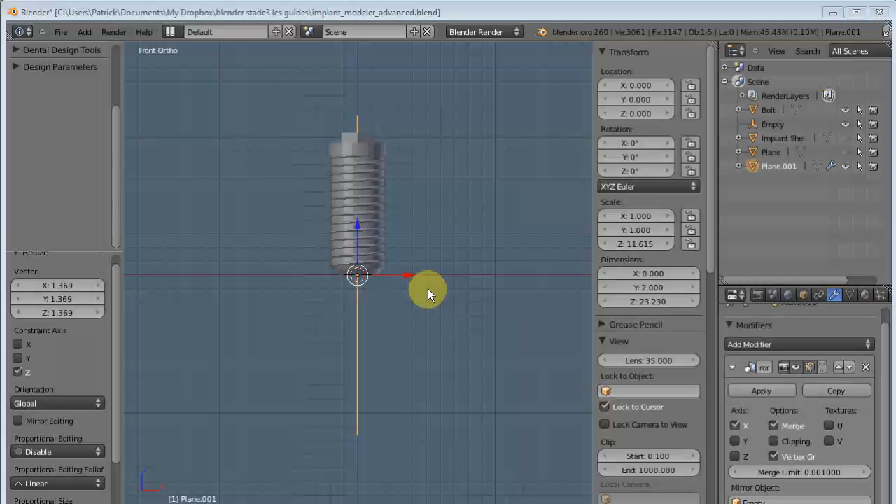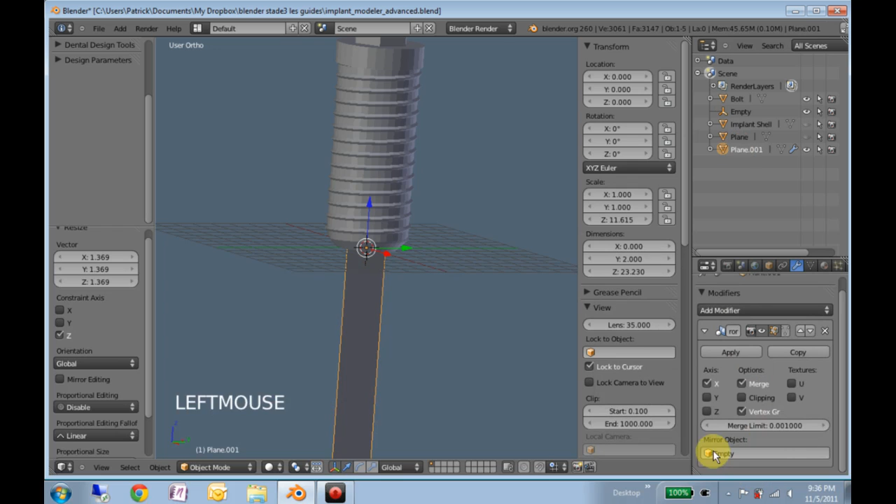Wanted to demonstrate quickly how to make a tapered implant. What I have here is a plane which I've just scaled to be long enough so that it covers the whole implant. I've added an empty at the origin, and then to the plane I've added a mirror modifier.

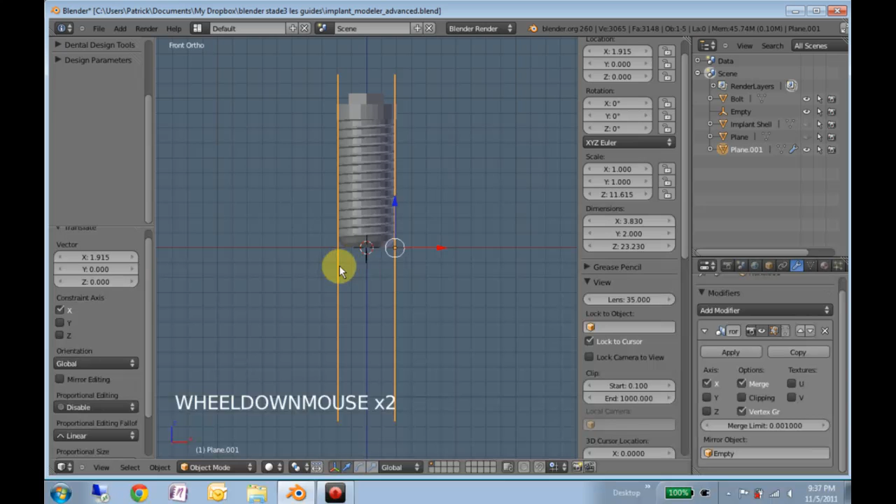So this one, and then made the mirror object the empty. So that allows whenever I move this, I get a corresponding mirrored plane on the other side of the origin. So if we know what we want the apical diameter of our implant to be, we can move this plane. If the apical diameter is, let's say, 2 millimeters, we can move the plane 1 unit to the right.

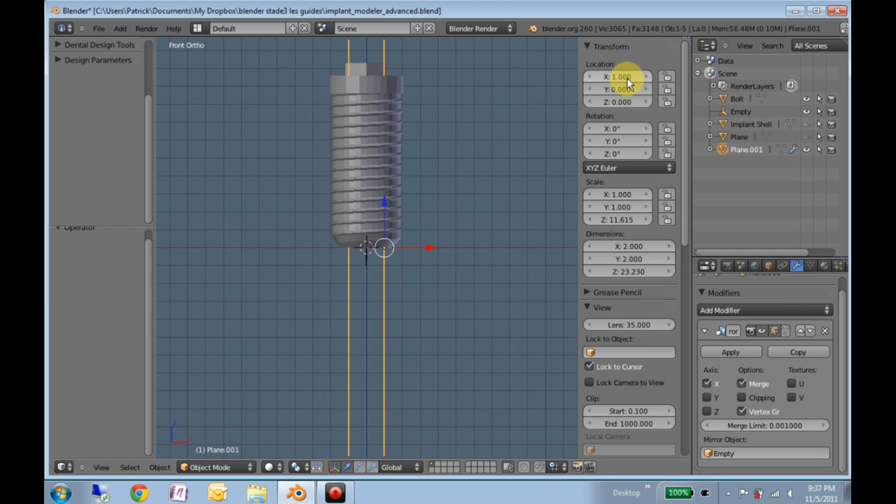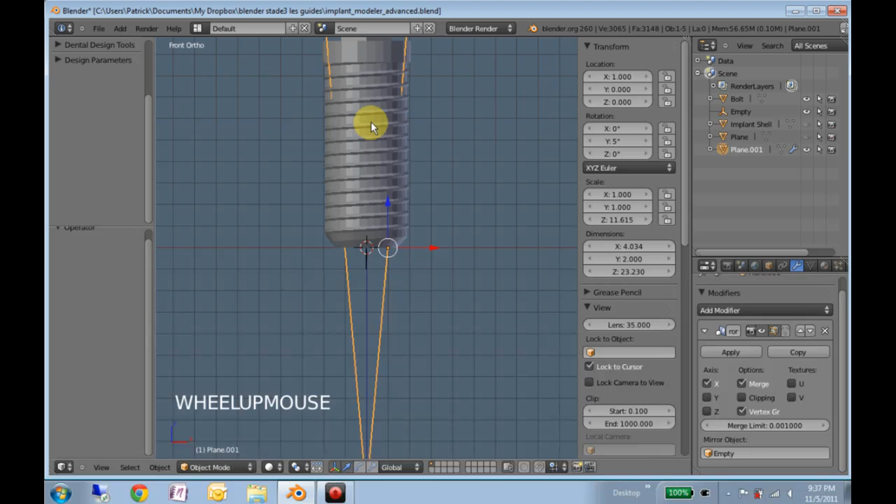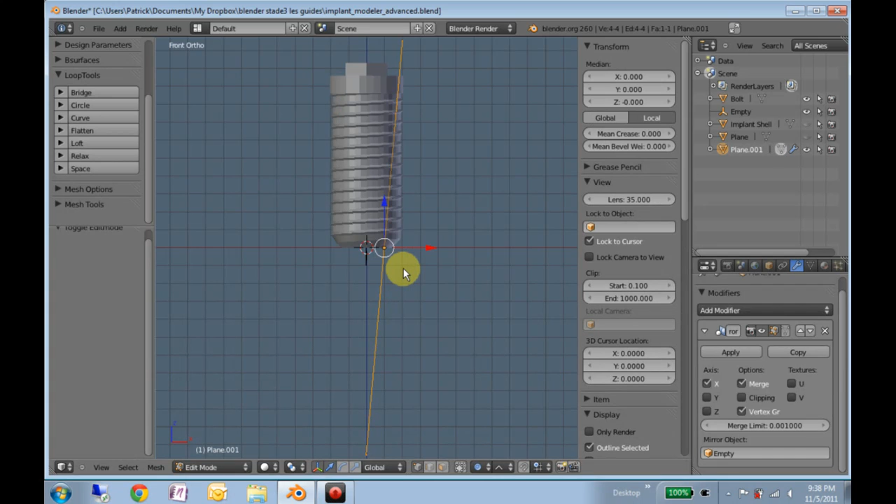And if we know the taper is 15 degrees, rotate it like that. That's probably a bit much, but 5 degree. Okay, so then we'll use that as our guide. Here, tab into edit mode. I can't see the planes. Let me do one quick thing. Okay.

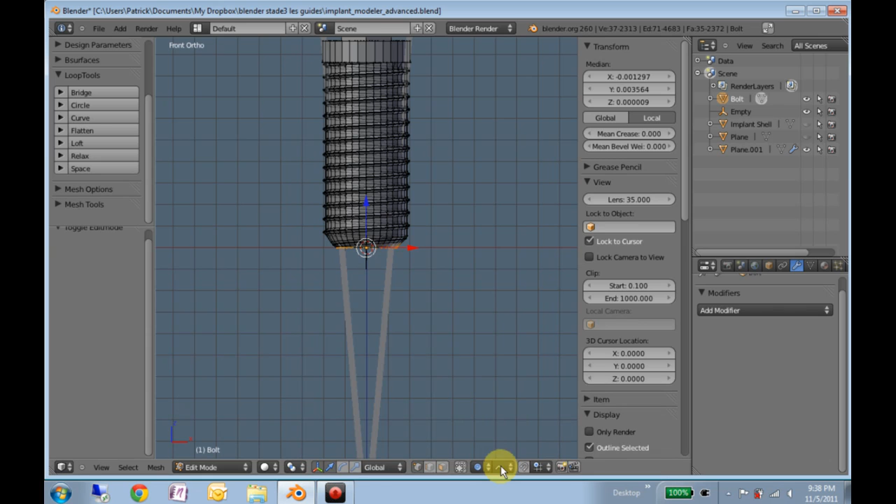So once we're in edit mode, we'll enable proportional editing, make it linear, which it is, and then select just the bottom set of vertices. That will allow us to scale, and we'll limit it to the X direction.

So we don't want to include the collar. Well, I guess you can, but then you can use your guide geometry to fit yourself within your guide geometry.

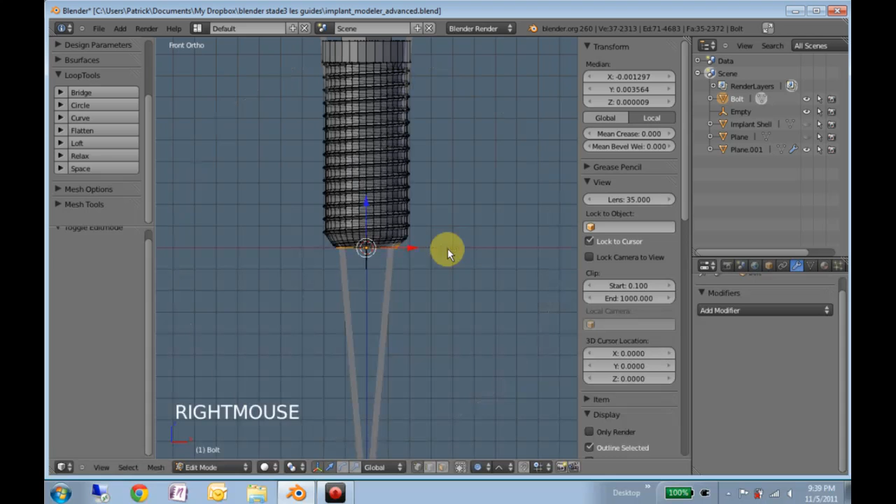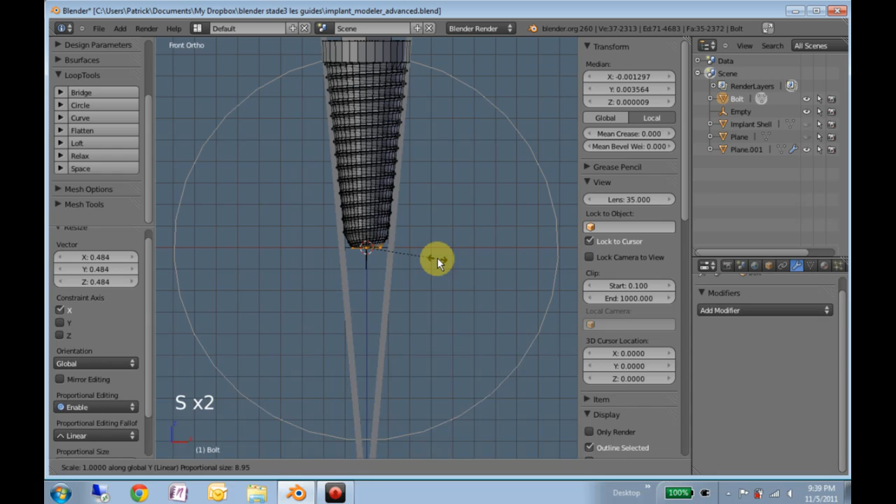Now, if you look onto the bottom left, I can't point with my mouse because I'm in the process of scaling. But if you watch right here, okay, so scale X, you see I can't point to it, but it's going to say something like 0.4839. So we'll click to confirm. Remember that number, scale Y 0.4839.

Now when we look at it from the side, we've got the same taper as well. Notice by limiting to X and Y, we did not change the pitch of our threads. So it's not perfectly exact, but it should be pretty close. All right, and that's how you make a tapered implant.